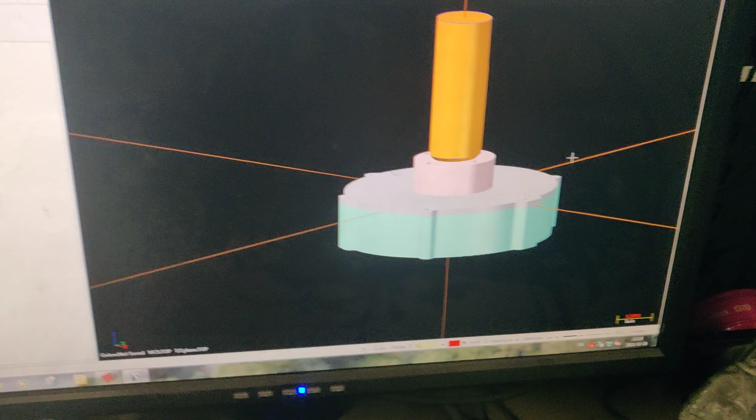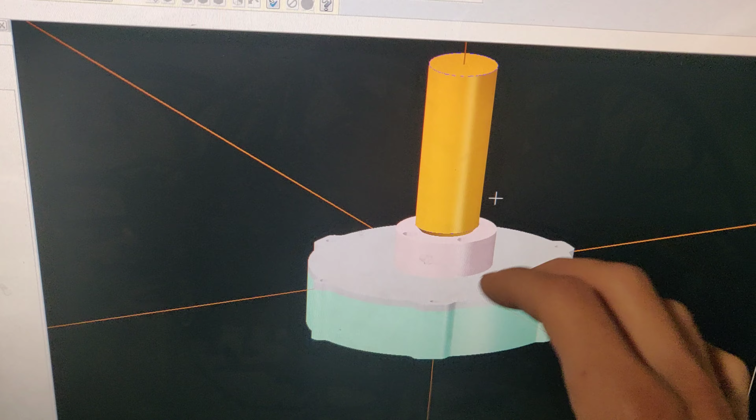I know when I show you this it doesn't mean a lot to you. All these lines, what are all these lines? Basically, I draw all my drawings of the compressor, the motor, and the pieces I need to make, to be sure it's gonna fit there. So I draw all I need to be sure it fits, and if I need to do some modification, I can.

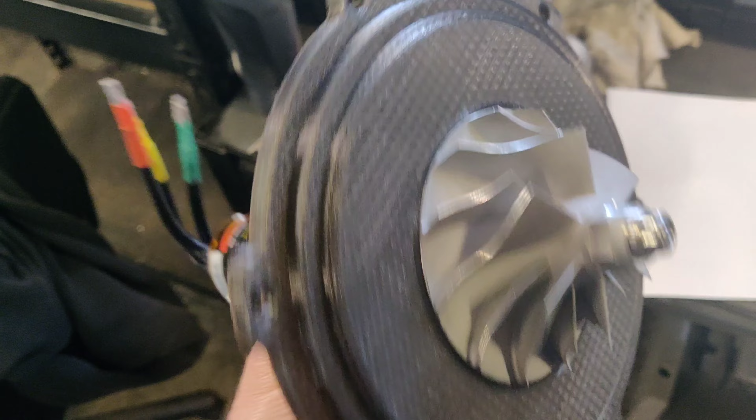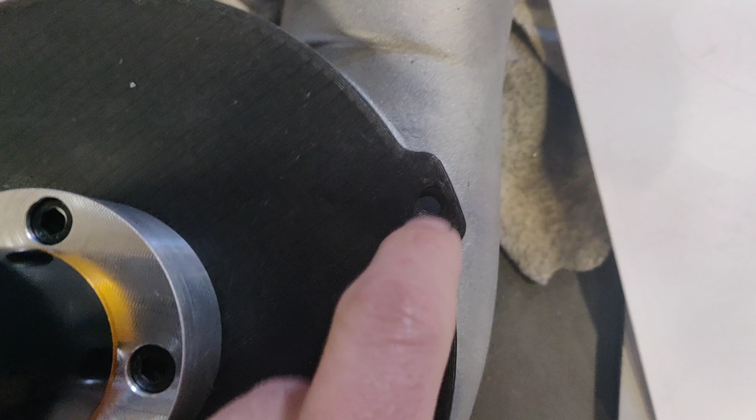So basically, I 3D print my backplate, the piece in plastic, black, to be sure all is good, and this is looking pretty good. But now I know that here I need to do some modification because the hole doesn't fit.

So I have my laser cut plate here, and I need to transform this into this. So this is the part I have.

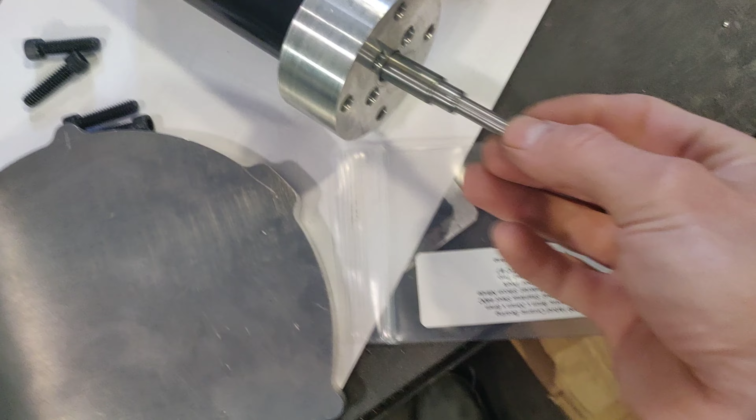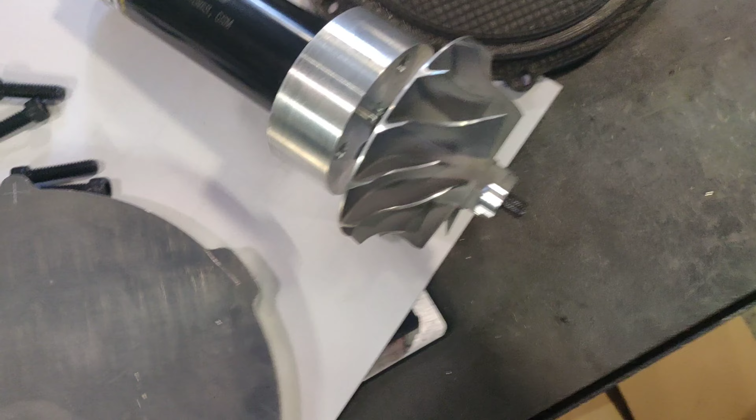I made the shaft go through the motor, through the turbine. I have this little space between them to put this bearing in, and this is the back plate going right between them. The bearing goes there too.

And there we go. So for today we're gonna finish all the parts of the turbo, but we won't install it on the car because it's still winter here and I want to wait for summer, and I have some parts I need to buy.

So for today I'm gonna show you a little bit of the process of machining something with the CAM program. I'm gonna show you a bit of the machining process. So what I did here is pretty simple.

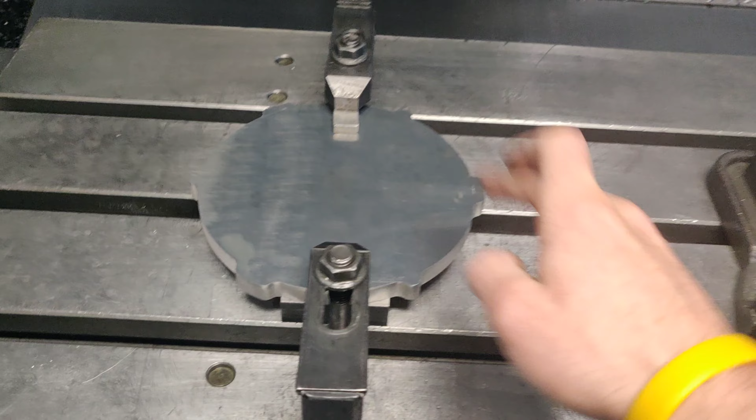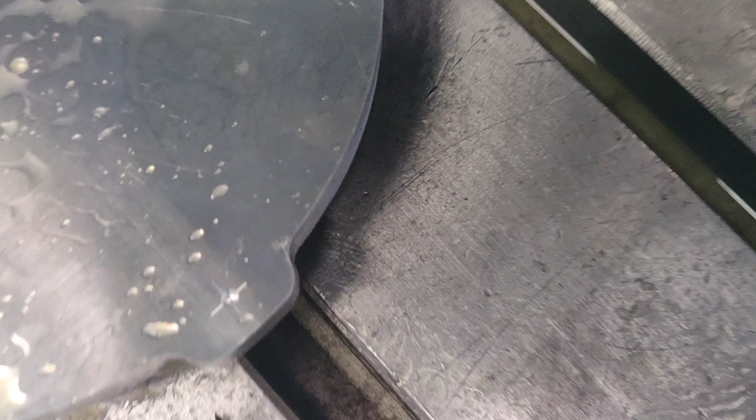I just clamped the piece to the table, and I take a bunch of points on my piece and transfer them into my drawing to orientate it to the table. So now it's perfectly centered. So far the spot drill is looking pretty good, so we continue like this. So far so good, it's going great.

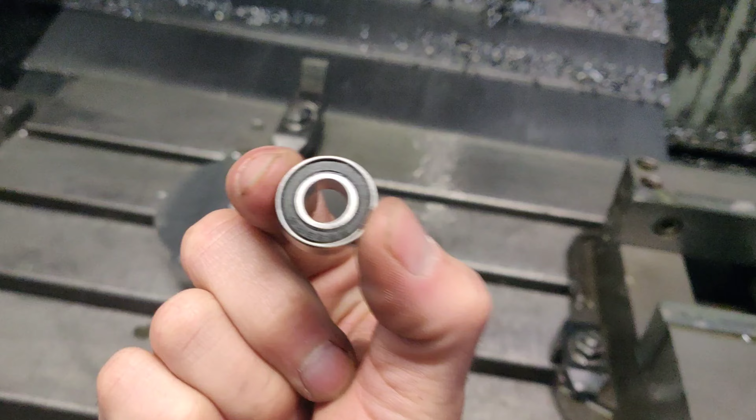But now, this little bearing cost me $150, and I need to make the hole. I don't want it too tight or too loose, but now I think it's okay.

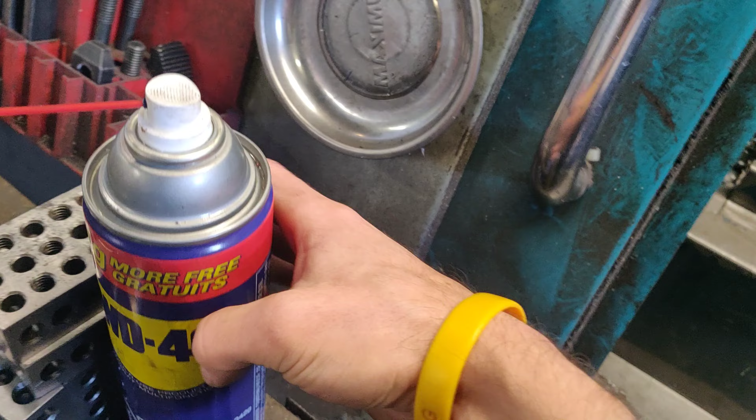Let's continue. A nice trick to know: when you machine something weird, you can't put it in the vise, or if you can't clamp it to the table, use double-sided tape and glue it to your table. Of course, don't use coolant — use WD-40, and for aluminum it's awesome. So use a little bit of this and you're good to go.

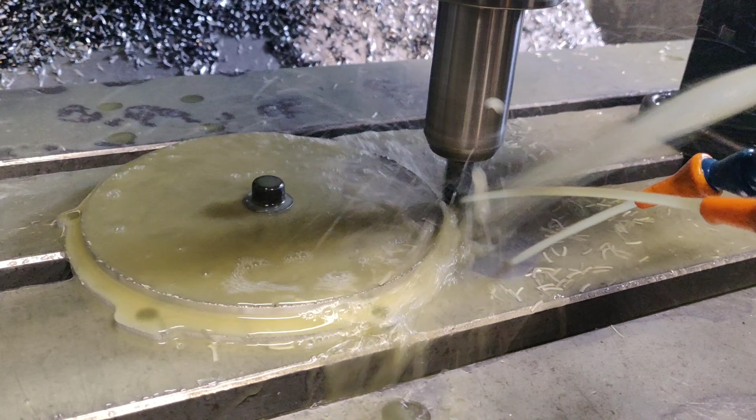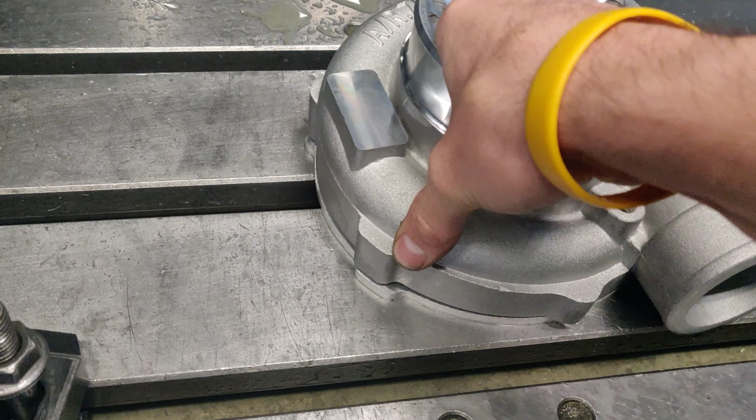As you can see, the double-sided tape doesn't work because I used too much WD-40, so it dissolved the glue on the tape. But now the turbo fits right on it. So let's move to the next step.

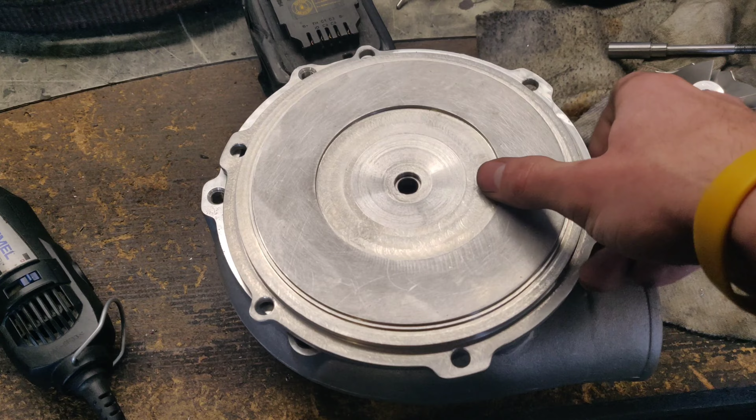So the part is finally done. The turbine goes here, and I have my bearing on the other side.

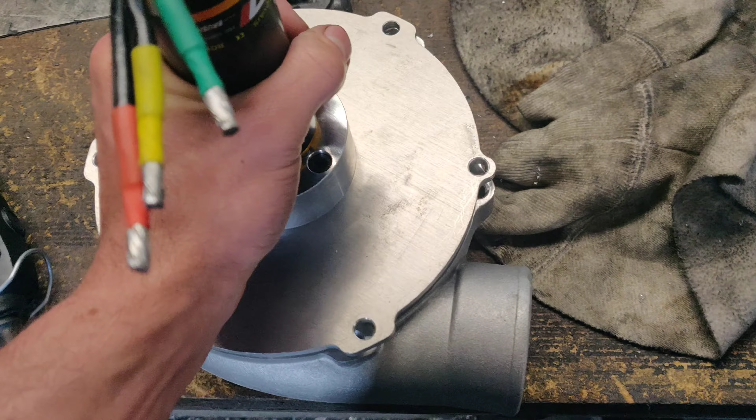I'm gonna mount everything and show you after that how it looks. Everything is mounted and everything looks great. The fitting is good, really good, and yeah, basically I have my electric turbo now.

I know that today is a short video, but I promise you the next one is gonna be awesome, because we're gonna install this and hopefully make some power.